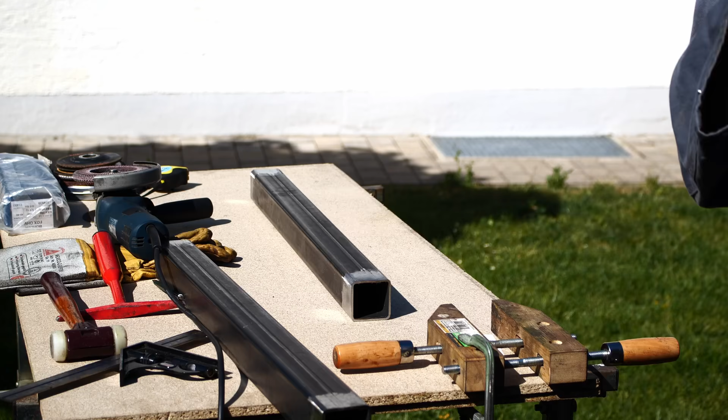Also trying to clean off most of the mill scale. I know that a flap disc is not ideal to remove mill scale, but that's a 3M Cubitron flap disc, and it's quite aggressive and it works okay. And then it's just a matter of clamping everything together and welding it out.

This is the cross member that the machine will sit on, and it's quite a tight fit in the frame, but nothing we can't hammer in place. I double checked with tape measure just to get it a reasonable parallel.

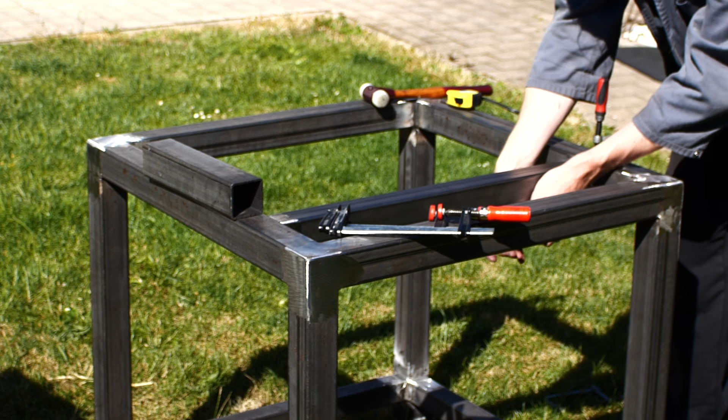The cross-section of the cross member that the machine sits on is smaller than the surrounding frame, because when there is oil on the machine and it's dripping down onto the cross member, I don't want it to run off the frame's side, which would happen if the cross member was the same cross-section, therefore flush with the top of the frame. Here I'm using 2 cutoffs of the square tubing and some clamps to get the cross members flush with the underside of the frame. This arrangement of clamps and the stock pulls the cross member parallel to the underside and flush.

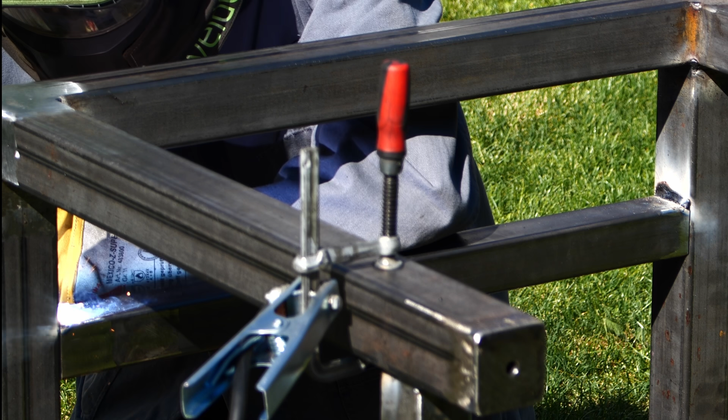And then it's just a matter of welding everything out. I'm not the greatest welder in the world. I'm okay at TIG welding, but with stick welding, I'm always a little bit in trouble. But usually I can stick stuff together and it does not fall apart.

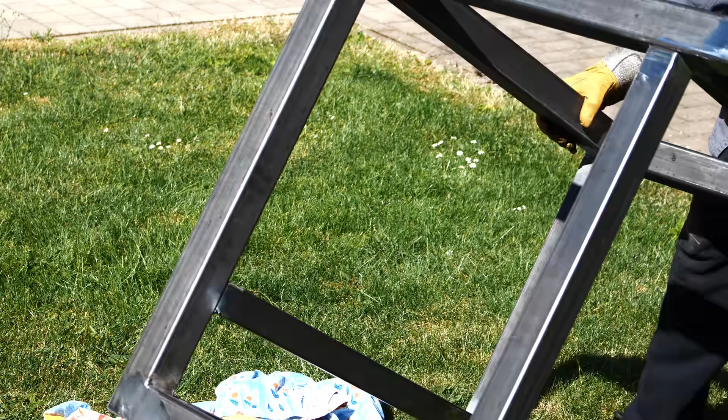It's nice that the frame is small enough so I can flip it around to weld always in a good orientation. I don't have to do uphill welds or overhead welds on this thing. So I can just flip it over and always weld in a good position.

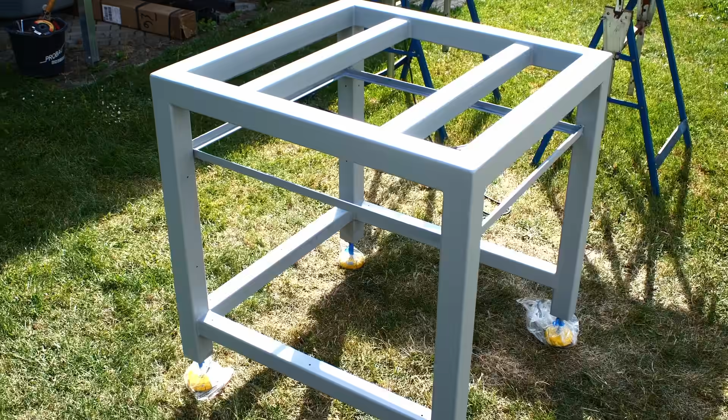And here is the finished frame. It's welded, ground, and painted. It will have side panels, but those will be screwed in with some angle brackets. The holes for the angle brackets are already there. The thin profile frame beneath the machine mounting surface is for a chip drawer.

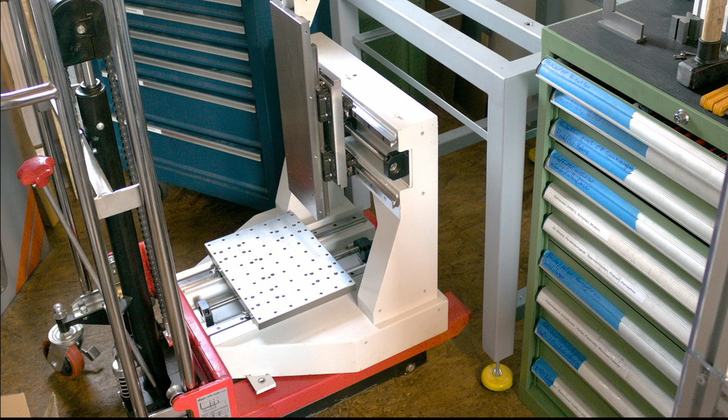The small hydraulic lift cart was more than adequate to lift the frame onto the stand. As it's shown here in the picture, with the rails, the ball screws, the X crossplate and a Z-axis plate, and the table, everything together weighs about 185 kilograms.

I want to make it a nice, rigid micro milling machine to replace my Sorotech CNC router. The CNC router is definitely going away. I'm going to part it out and sell off the components. The CNC router doesn't owe me anything. I have made so many parts on it and it paid numerous times for itself.

But the kind of work I'm doing on the CNC machines has changed. It has gone from larger aluminum work and larger plastic work to, well, aluminum and plastic parts that are about the size of my thumb.

A smaller, more rigid, and also thermally more stable frame will be very nice for that. The Sorotech router did definitely suffer during the day from thermal growth. The machine has really been great for what I purchased it for. It has been dead reliable.

The Eding CNC controller, despite having its problems, especially on 3D machining, and being a little bit slow, apart from that it has been dead reliable, and I'm going to keep the controller for now. I will just make this machine plug compatible, so I'm just changing out the plugs between the stepper drivers, the limit switches, and the spindle, and it should work. It's already working in one axis because I'm impatient.

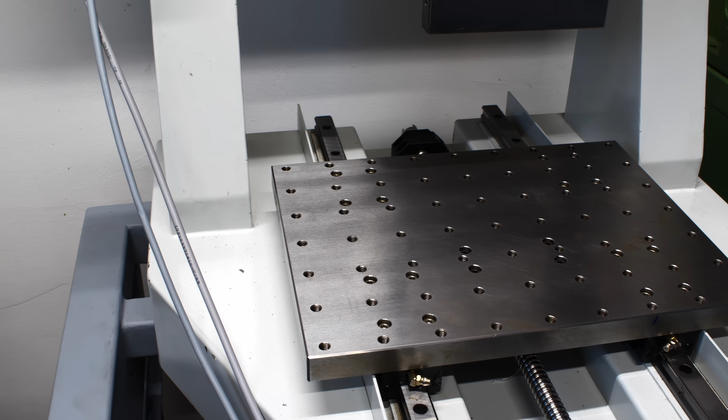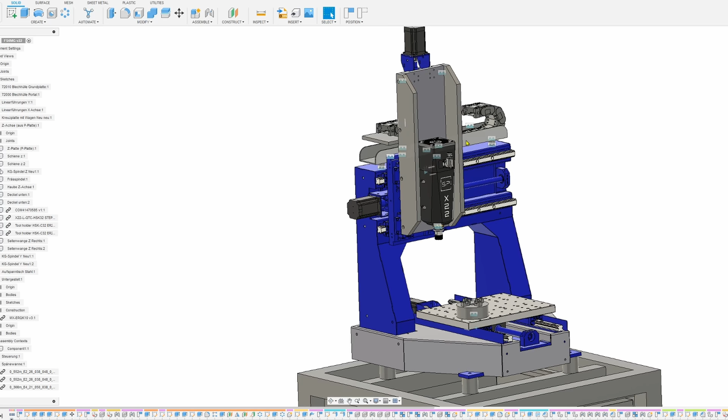2 kilowatt, 25,000 RPM. So here's the CAD model for the milling machine. Just to get an idea, I took the 3D model of the X22 spindle that I ordered with an ER20 collet chuck and put it onto the Z-axis, and this gives me already a pretty darn good idea about the final travel of the thing.

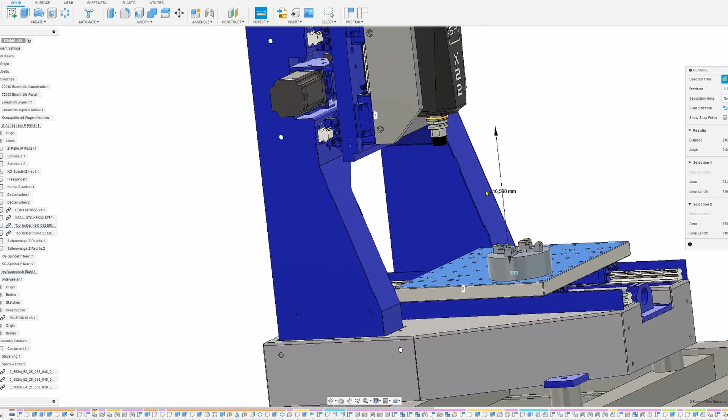In the most upper position, I have about, let's do an inspect here, from here to the table, 216 millimeters. So I have at least 200 millimeters from the tabletop to the collet nut. Then minus the tool length, so I can work on some parts that have a little bit of height.

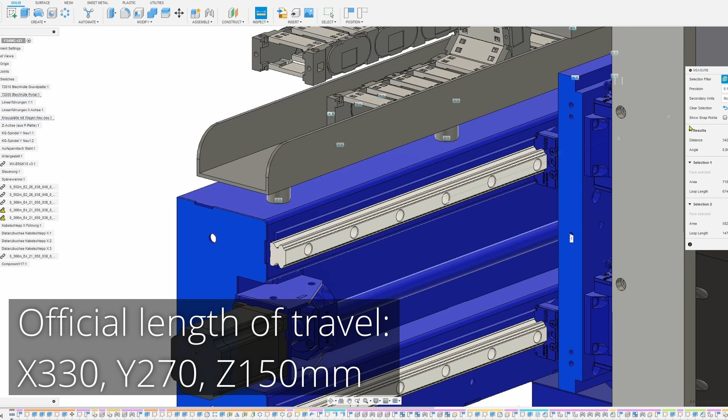The overall travels of the thing are about 340 millimeters in cross direction. The official travels are a little bit smaller because I think they leave a little bit of margin for error, and also some space for way covers, which I do not take into consideration for these measurements now. Just to give you an idea how small or big this frame is, the table travel is about 280 millimeters.

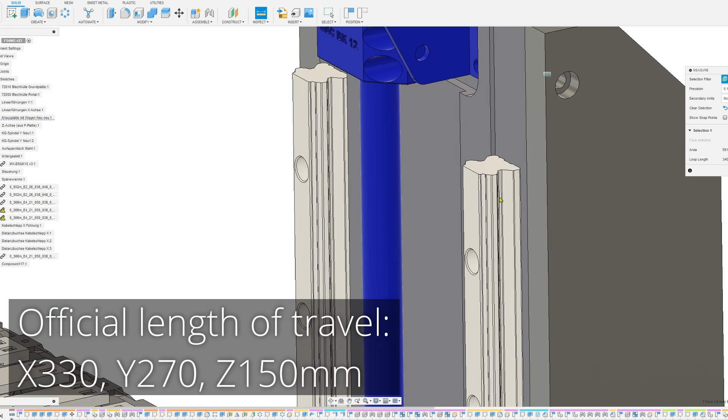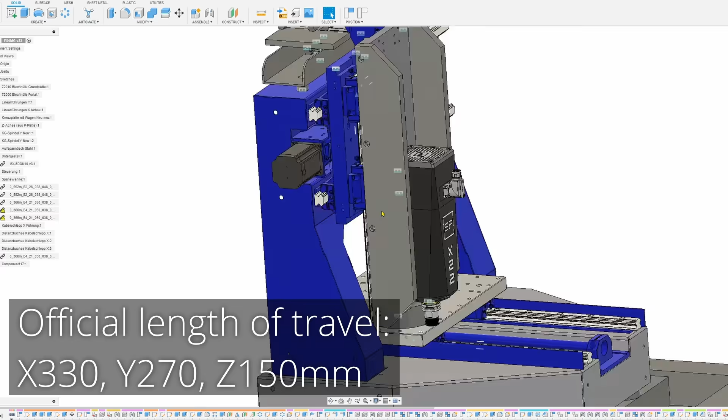It's a nice little stout machine frame. As you can see, I already played around with the drag chain up here. And just like some people, the machine is a hollow shell of itself—they did not put the epoxy granite in the 3D model. And no, on this machine you cannot separate the gantry, the blue gantry, from the base. That's one piece, not meant to be taken apart.

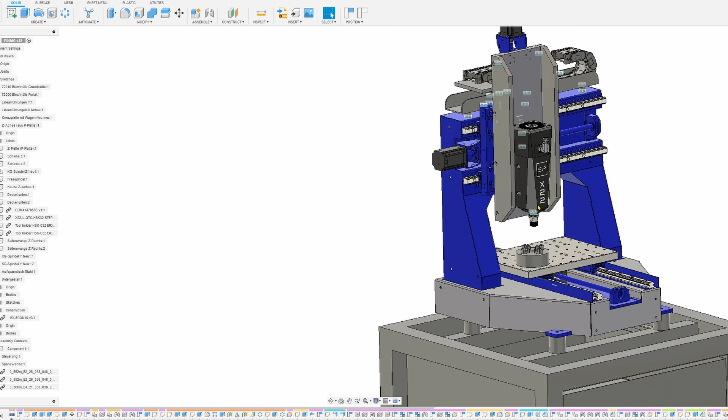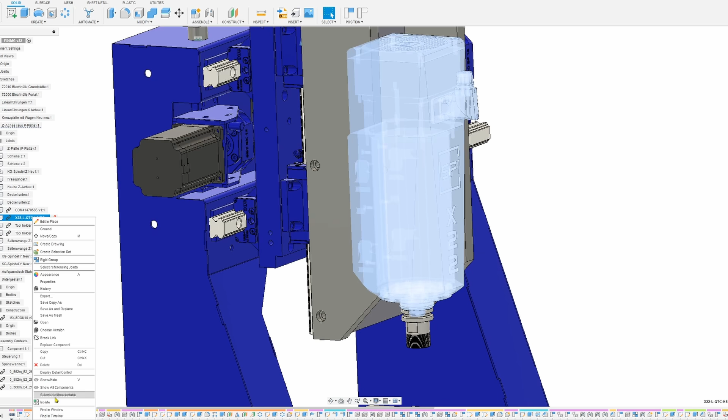You would need an angle grinder with a diamond wheel for that. But yeah, that's how the spindle will mount, and the nice thing about the Spinogy spindle is it mounts from the front. They have keyholes on the back where you just hook it over some screws, and then you have this angled hole where you can tighten the screws from the front. So you don't need an adapter plate or need to screw it from the back, which I think is quite a nice design feature.

And I didn't go with a water-cooled spindle. I have chosen the air-cooled variant with a separate 24-volt fan.

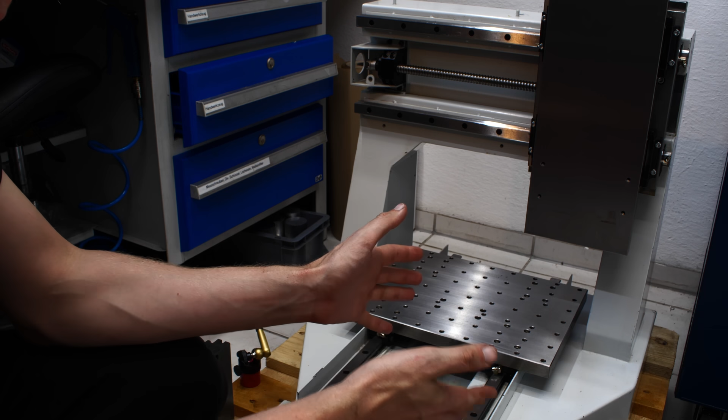There are a few things in the machine geometry, in the milling machine geometry, that we can check. The first and most basic thing is to check the flatness of the table in relation to the X and Y axis. That's very easy. We just put an indicator on the Z axis in this case. I have a small magnetic base here.

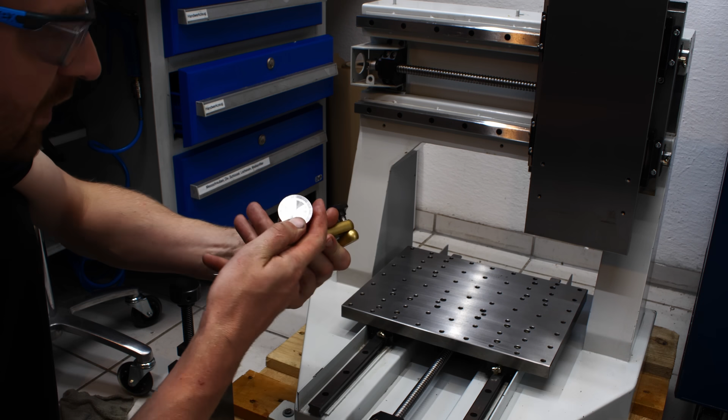We can drop an indicator on the table, get it in contact, and now we can jog the table. Since I don't have motors on this machine, this is my drive servo now. We start by jogging over in the X-axis, or what will later be the X-axis.

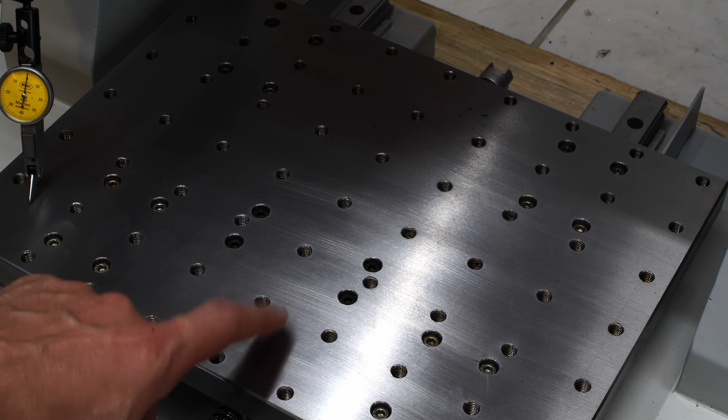I think we went from 0 to 0 on both ends with a 20 micron dip in the center. Let's mark this down. Now we move the table to the front, which means I have to reach back through the machine frame to get to the coupler.

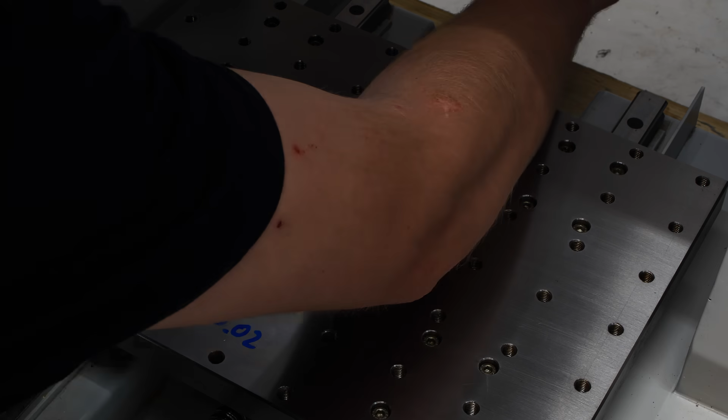Okay, excellent framing on the video here. We're still at 0 here. Now we move the indicator over here using the X-axis again. Okay, here in the middle we have this minus 0.02 millimeter divot again. And we're at plus 0.01 millimeter out here.

Let's move it to the center of the table too, because that's kind of interesting. Okay, that's also minus 0.02. So the entire flatness of the table, as I've mapped it out by now, is within minus 20 plus 10 microns. We got the flatness of the table sorted out.

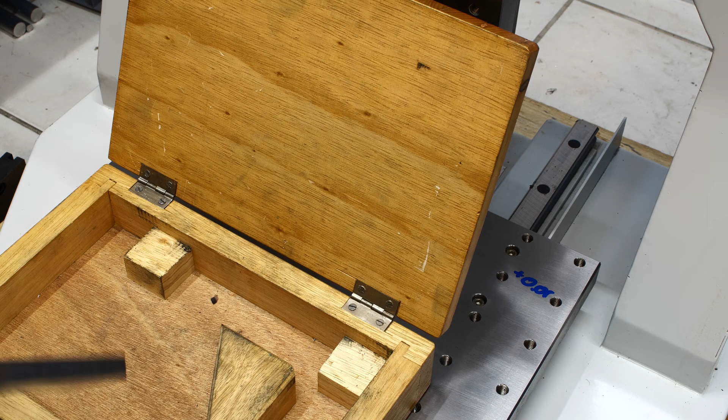Next thing would be the squareness of the X in relationship to the Y-axis. That's also very important. I have a reasonably accurate square here. Last time I checked this, it was basically a deviation of less than 10 microns squareness between those two sides of the square.

And for checking the squareness, we put this on the table. We will clamp it down with one bolt, just so it stays in place. Brass shim, so we don't damage the square. Heavy washer and a nut.

Okay, and to check the squareness now, we align one axis of the square with one of the axes of the machine, meaning we get our indicator here. For those who are wondering, this tiny indicator stand is made by H&G. A friend showed it to me, and I like to have a small indicator stand in addition to my large ones, and this has an excellent fine adjust up here, and I'm very happy with it. So I got it here on 40, and I'm traversing the x-axis with the cordless drill,

And I'm going to bump the square. Okay, that's not too bad. We start at 41.

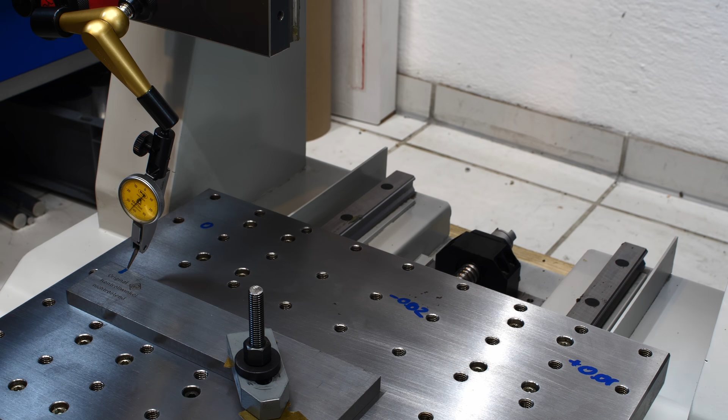Okay, I get basically a 0 to 0 reading end to end, and this also checks the straightness of the axis we just moved, so that's very convenient. So we're double checking two parameters here.

Now that we have one axis of the square in line with one of the axes, we can move the indicator over to the other side of the square and check how square the other axis is to the first one. You'll probably get a little bit of a parallax error because you're not looking straight on the needle, but you just have to look for movement of the needle, not the actual reading. Let's get my power feed back there.

So that's a squareness of 10 microns over this distance. How much? 130 millimeters. So that's very reasonable. That's really nice, I like this.

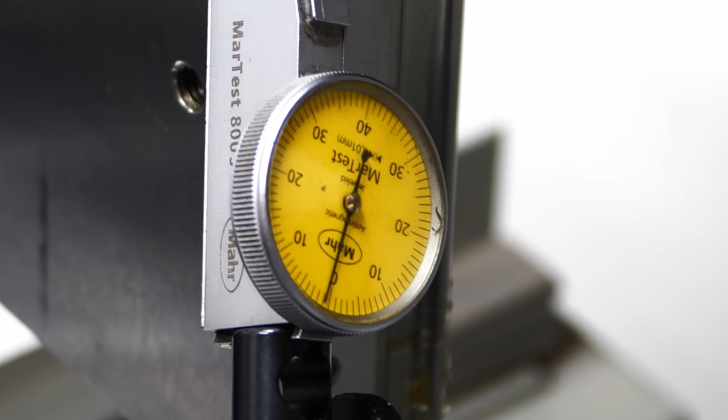To check the backlash of the ball screw, I hooked up the stepper motor and the driver to the control of my CNC router, and I'm stepping back and forth 10 microns on the hand pendant. And that's pretty much exactly what I get on the dial test indicator measuring the actual movement of the axis in both directions, meaning there is no lost motion or backlash, or very minimal, within the 10 micron resolution of the indicator, which also has its own measuring error. But that's already very, very promising.

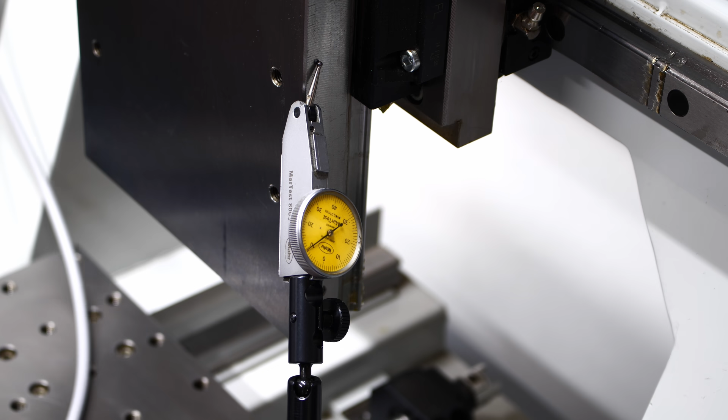Look what arrived during filming this video, the spindle. This is a Spindle X22 HSK32 spindle with a manual tool change, 25,000 RPM spindle.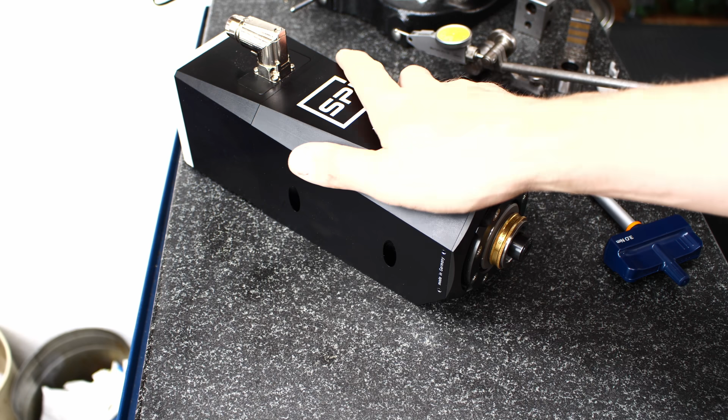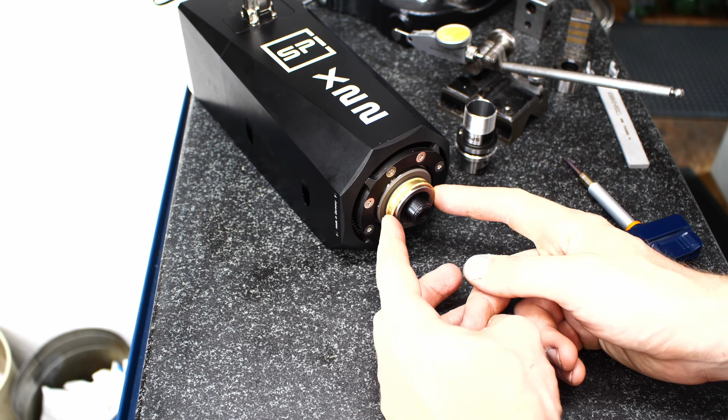They're made in Germany. They built the complete motor themselves, and the HSK interface in front here, this part is from Kern. You can purchase that if you want to build your own HSK spindles. The interface and the clamping mechanism that pulls the HSK tool holder into the spindle, that's purchased.

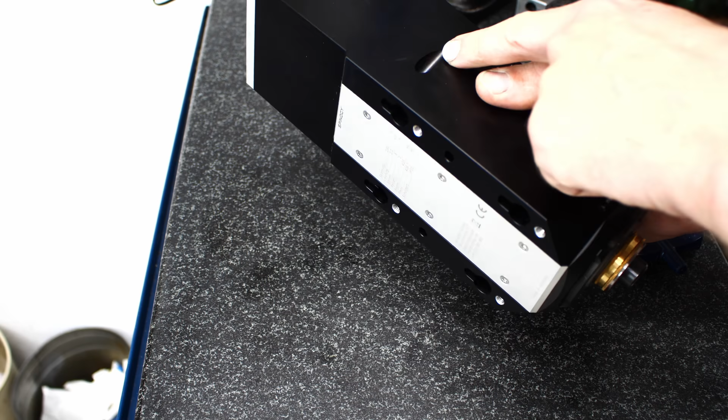As I mentioned, they have this key slot feature on the back, so you can bolt the spindle on from the front. You hook it over the screws, and then you tighten it down from the front with a ball end Allen key through this angled slot.

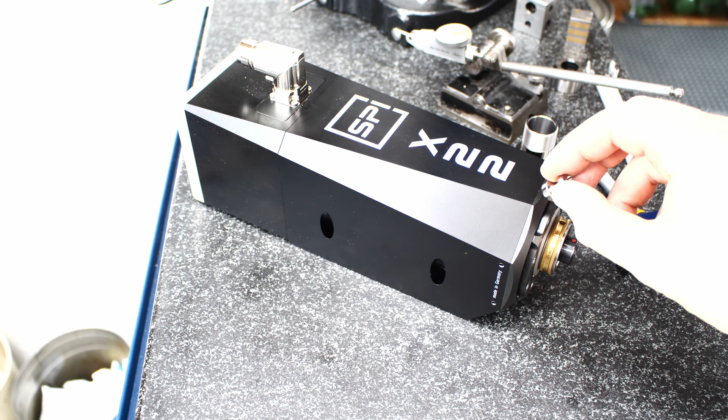Most of the housing is aluminium. It's nicely machined and anodized, what you would expect. But this lower cap here, this lower end, is steel. So I guess this extends somewhat into the aluminum housing, and I guess—that's a wild guess now—it contains at least one of the bearing sets.

Why I really bought the spindle is the HSK interface. After a few years of running collet spindles, like on my Sorotec router, using two wrenches to tighten and loosen ER collet nuts, I decided it's time for an upgrade.

And the way this spindle works, you have an HSK interface and a regular HSK-C tool holder. As far as I can tell, or as far as people helped me figure out, HSK-A should also be clampable with the system. The only difference is HSK-A has an index notch for a tool changer, and the groove for the tool changer arm looks different, as far as I know.

So you have a dot on here, an engraved dot. You align it with the red dot on the spindle.

It goes in. Come in with your torque wrench, and you give it something like 2 rotations, and then it's clamped.

To get the tool out, you open it until you feel a little bit of resistance. You overcome the resistance, and then it gets pushed out of the taper. This is a very shallow taper, so it's extremely self-locking, like a Morse taper. For that reason, you need the force to push the tool out of the interface.

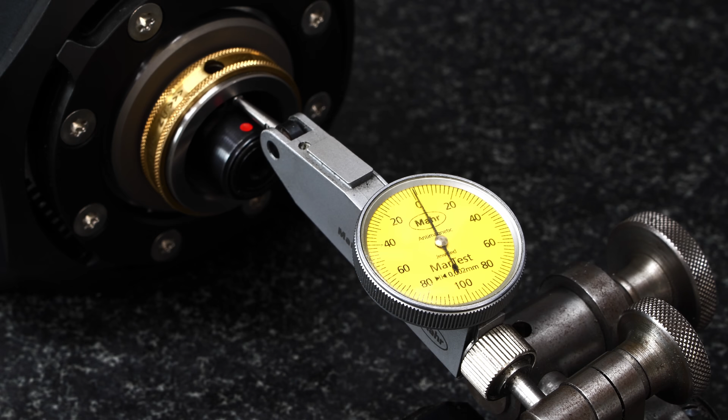That's a 2 micron indicator, and the needle is jumping between 0 and 2 micron. So that's very promising already. Let's see how it behaves with a tool holder in it.

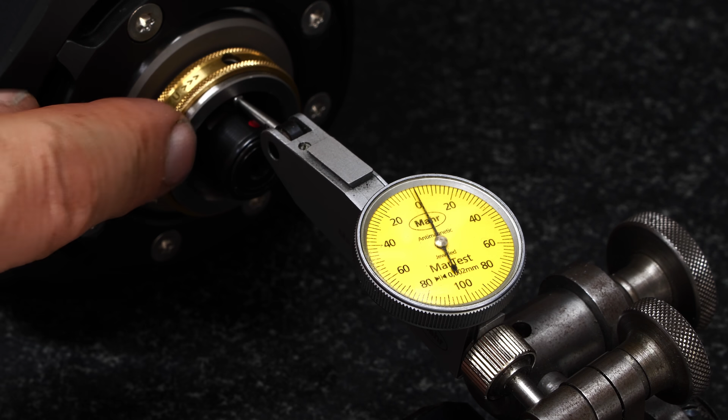While we're here, we can take a look at the clamping mechanism. When you look down in there, I come in from the side with the Allen key, and when I spin the Allen key, this block comes out to the side. That's a floating element in the spindle. That's really hard to show. It's this block that gets wider and expands into the back of the tool holder.

And since it's floating in there, it's finding its center in the tool holder itself. That's the reason why it's floating. It's self-aligning, basically. I need a taper wiper for HSK32. Don't have one. Forgot to order one.

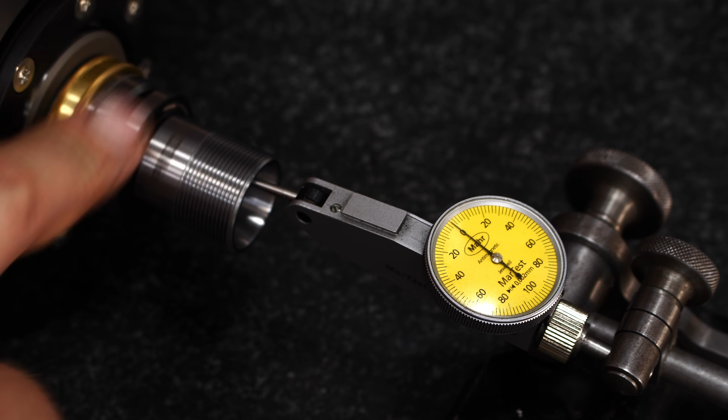Let's get the tool holder in. Yeah, that's about the same as in the spindle taper. That's really darn good runout for a reasonable, affordable spindle. Considering what a spindle on a vertical machining center costs, this is really a bargain.

I know it's real money. I think the spindle and the tool holders were about something like 3,500 euros, including tax. But still, that's an incredible degree of precision that you get here.

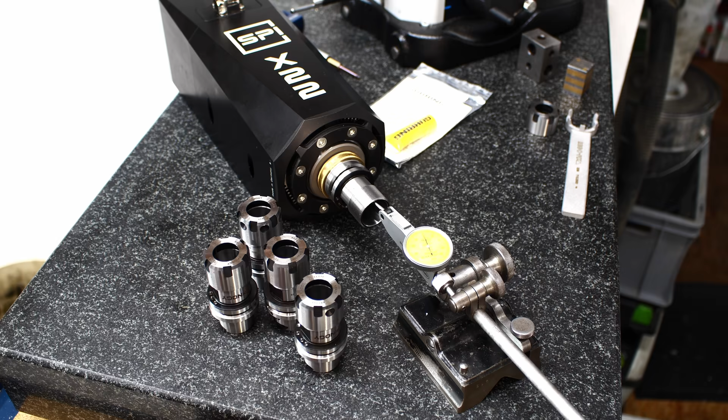Of course, running the spindle will tell the whole story. Just measuring runout and things like that on the surface plate doesn't tell you a whole lot. So I purchased the spindle with 5 tool holders, and it also came, well, I also bought the torque wrench, collet nut wrench. The spindle comes with some molybdenum paste and the manual for the HSK interface.

You have to lubricate the interface from time to time. That's the same as on a real VMC spindle. Also got the shielded cable with the correct plug.

They have other options on RPM. I think you can get them up to 55,000 RPM, but I decided against the high RPM spindle because 25,000 RPM is usually a very good range for general small machining. Not speaking micro machining, but for end mills down to 0.5, 0.6 millimeters, it's perfectly adequate, and you can make smaller end mills work on such a spindle without problems too.

You just have to keep your chip load the same and reduce the overall feed. It has a 24-volt fan on it, so the cooling fan that cools the spindle motor itself is not connected to the spindle itself, so it's not spinning at 25,000 RPM. And that means it's a little bit quieter than spindles with a mounted fan.

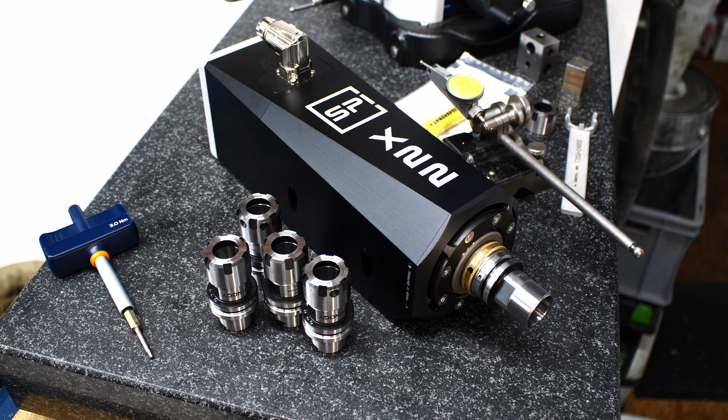The other option would be a water-cooled version, also an option on these, but I'm always hesitant with water-cooled spindles because that's a lot of added infrastructure and stuff that will leak over time. Notice that I said will leak, not could leak. That's the reality of industrial equipment. It's not the question if it will fail, it's the question when it will fail. And when it fails, how catastrophic will it fail?

So this is the motor I'm going to use on all 3 axes. It's a Lichuan Easy Servo Motor, model ESM 22430. This is a closed loop stepper motor. Means it has an encoder that tells it if it has reached its final position.

So closed loop system. It doesn't give you feedback of the axis position like you would have with a glass scale on the machine, but it gives you at least a feedback of the ball screw if it reached its destination, or if it lost steps in the process, or it crashed. If it crashes, it will give a follow error and the machine will e-stop.

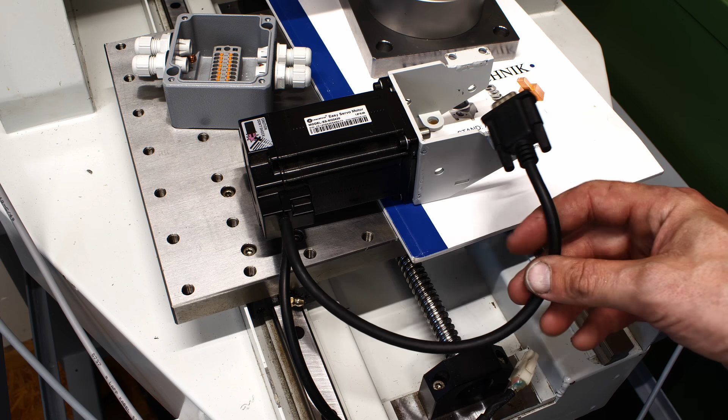That's very nice too. Problem with these motors is the connection. The encoder is hooked up with a 15-pin sub-D connector, which is okay, I think, this would be quite fine. But the motor windings are hooked up with this Molex mini-fit connector, I guess, and this just doesn't instill a lot of confidence in me, hanging out in the breeze.

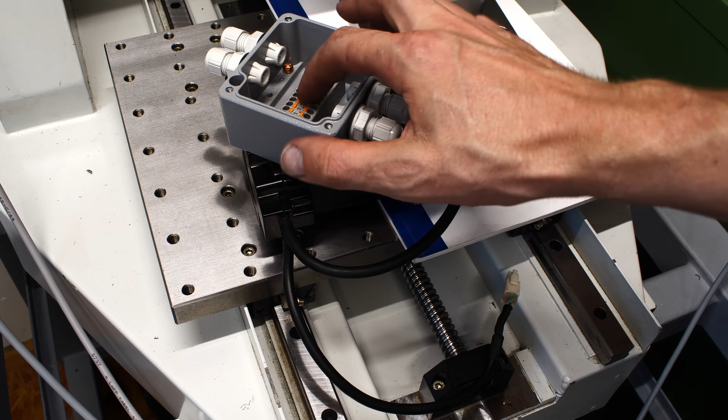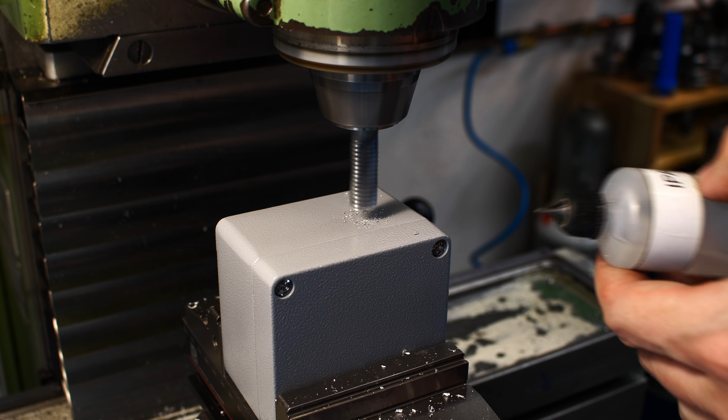So I figured I'd get some die-cast aluminum housings and put a terminal block in there. I cut off the wires or the plugs from the motor, run them in, and put the wires onto the terminal block. Then I can use some nice cable that can be used in drag chains to go out this box and directly onto the driver cards.

I'm drilling the holes for the cable glands with a 12mm end mill because, believe it or not, I do not own a 12mm drill bit. A nice sharp end mill works quite well for this purpose, especially since the holes are not very deep and it's just die-cast aluminum.

The cable glands from Lapp Cable just snap in from the outside, and then you tighten the nut from the outside. It's a fairly nice design. We used to use them at my day job a lot.

Since I already had the tapping head in the drill press, I went ahead and tapped the M2.5 threads for the terminal blocks with it.

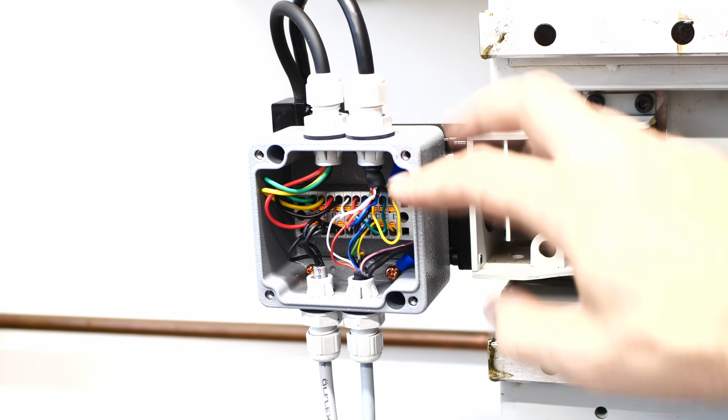Here is one of the connector boxes finished, with the motor wires and the encoder wires coming in onto the terminal block, and then I'm going out with cables that are suited to be run in a drag chain. I'm not stuck with the stinky little Molex connector right here in front of the mill.

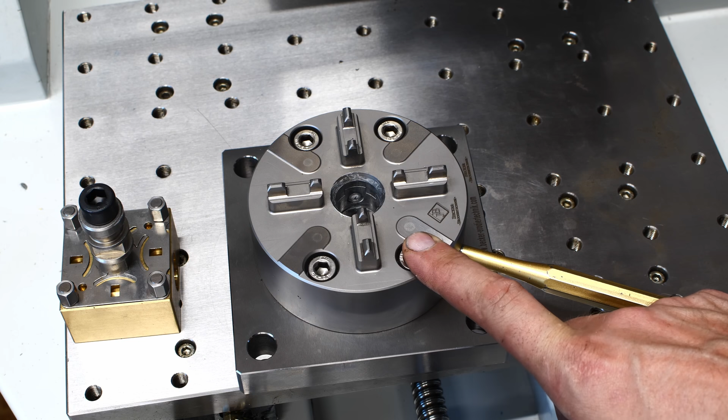This is the ITS chuck that I was talking about. I bought it from these people, Becker Erodiertechnik. It's Erowa ITS compatible - I think the patent from Erowa ran out and everybody can make these now. What it is, it's a zero clamping system.

Basically, you have pallets that drop in here, you lock them in place, and you can do your machining on these. You can unlock it, take it out, put in the next one, and each one will be located 100% - well, nothing is 100%, but very, very close.

I think the XY tolerance on the ITS chucks is like 3 microns. Same for squareness and parallelism to the base. Parallelism is probably even better, because it's a very simple arrangement to get the parallelism.

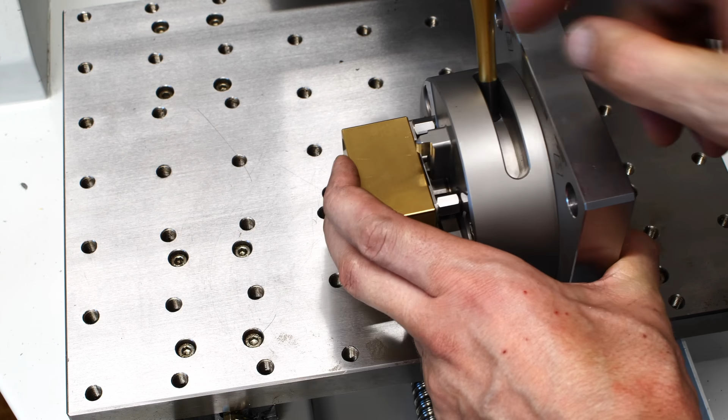So what that can also do, it can do 90-degree indexing. Let's say you have this standing up 90 degrees - you lock your whatever you're working on in it, do your machining from one side, then you can spin it around 90 degrees, lock it, and do basically poor man's fourth axis, relatively precise.

Normally you would find this system on real CNC machines, mainly or mostly, very much on RAM EDM machines and the machines that mill the RAM EDM electrodes.

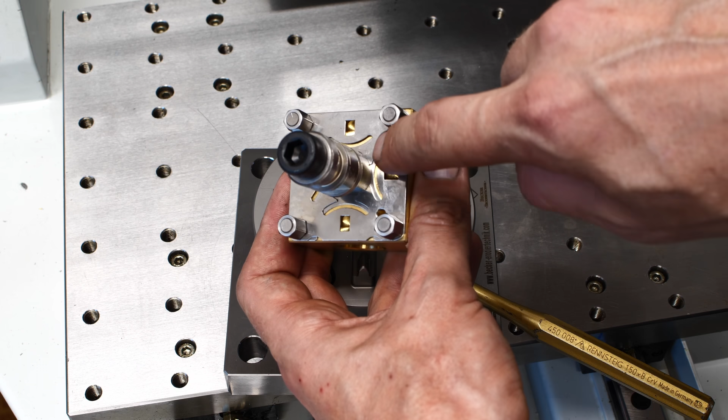The pallets locate via a stack of 2 spring steel plates. It's just those 2 plates on here, and they have 4 rectangular cutouts in them. The chuck has these ground posts, and these are slightly larger than the cutouts. You can see there is a banana-shaped slot in the sheet metal, and that allows these 4 pegs to expand the square hole in the sheet metal, giving a very much over-constrained fit of the pallet on the chuck.

The chuck itself gets pulled down on this draw stud on this tapered section here, and there is a set of 4 balls in the chuck. When you tighten it - this is a manual chuck, there are also pneumatic ones or hydraulic, I guess - just from the side with a pin, those balls get closer to each other and pull down on this ring and pull the pallet onto those 4 pegs.

And the Z height is defined by those 4 standoffs. When these hit those 4 ground surfaces on the chuck, it's seated and the Z height is fixed and you're ready to go. You can buy, for example, these brass blank pallets.

Usually you machine some sort of feature in it to hold your part. You can make everything an Erowa compatible pallet by purchasing the sheet metal set, the 4 standoffs, and the draw bolt. The draw bolt is the most expensive part. I think the sheet metal and standoff set is like 50 euros, something like that - not entirely sure.

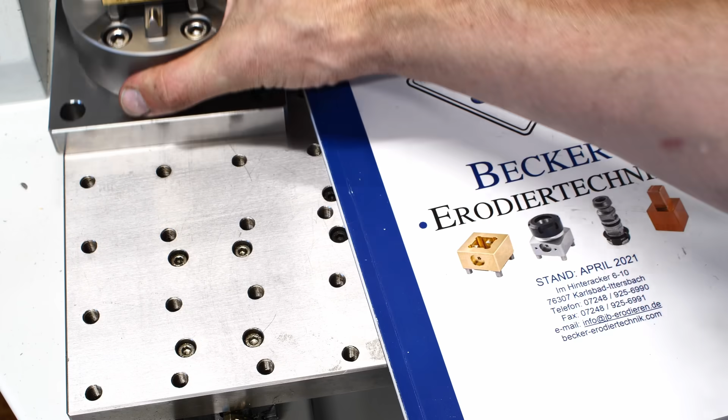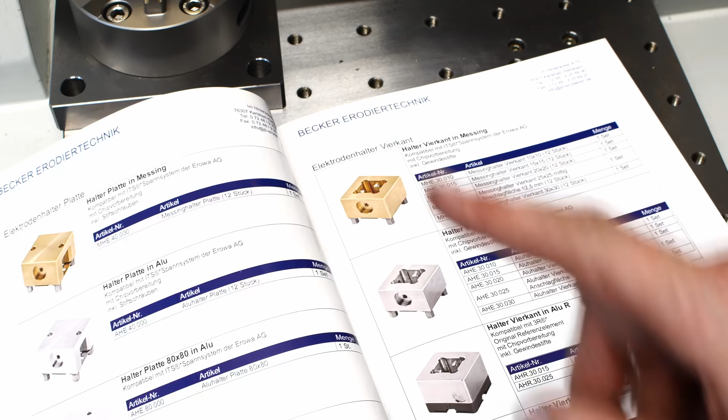You basically have a ton of options with these chucks. That's the catalog from the people where I got the chuck from. These are standard blanks, and also this is something that's very standard in the RAM EDM world.

This is an electrode holder for square, graphite, or copper electrodes for RAM EDMing. You can get them in brass, aluminum, or steel. Usually they come in sets of 12.

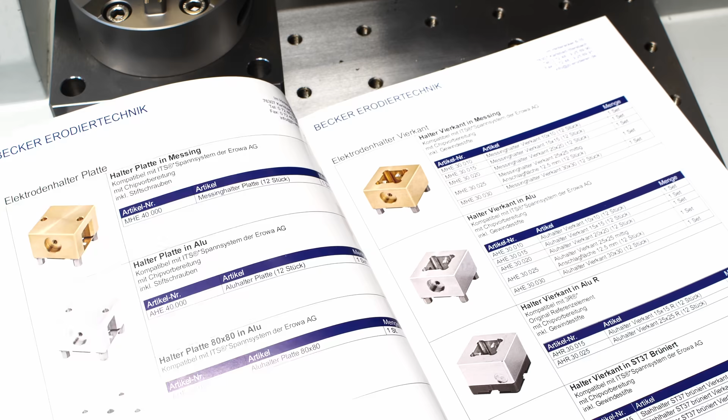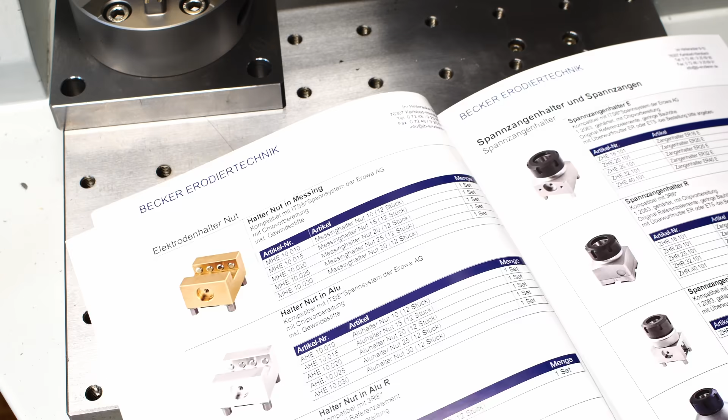You can get a lathe tool holder style option, where you can hold a slab of material in there with set screws from the side. You can get collet chucks that fit onto it, different sizes. And collets, even more collets.

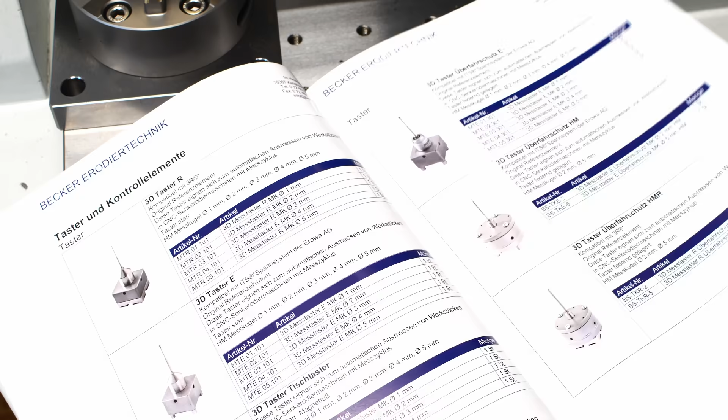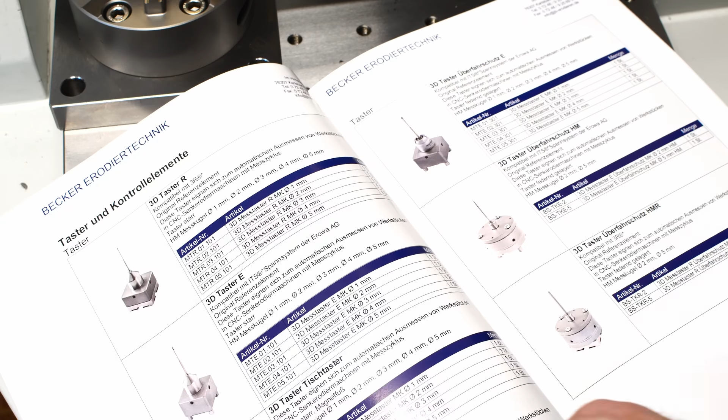These are probes. You need those on the RAM EDM machines because the chuck is not only used for the workpiece - you usually have 2 of these chucks on an EDM machine, one on the table for the workpiece and one on the RAM for the electrode to go bzz. On the RAM mounted one, you can use a probe to touch off your work coordinate offset. And there are also inspection arbors to find the center of the chuck.

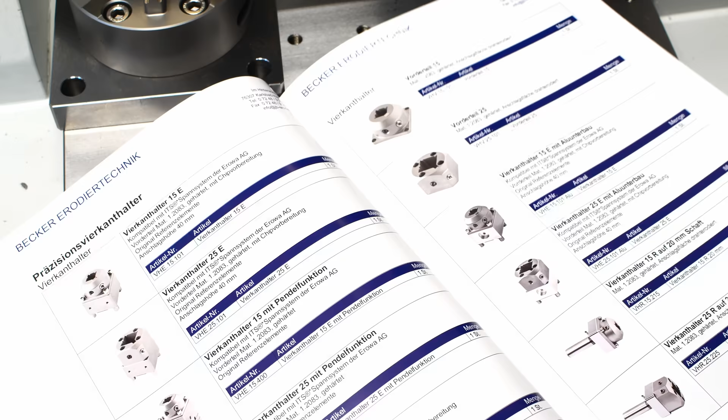You can get a microscope for EDM machines. There are adjustable electrode holders. Well, these are less interesting for milling. This is mostly for EDM people.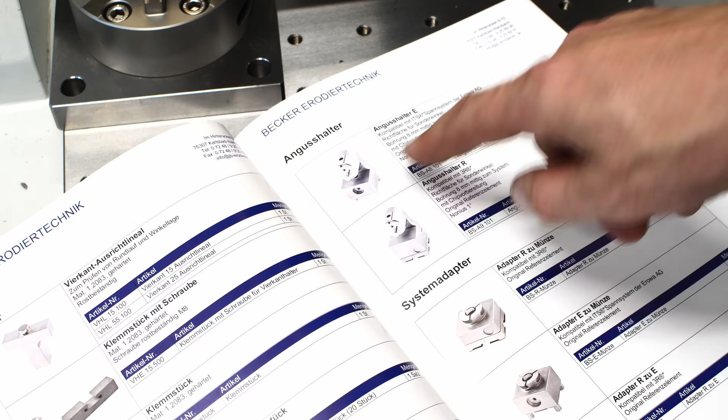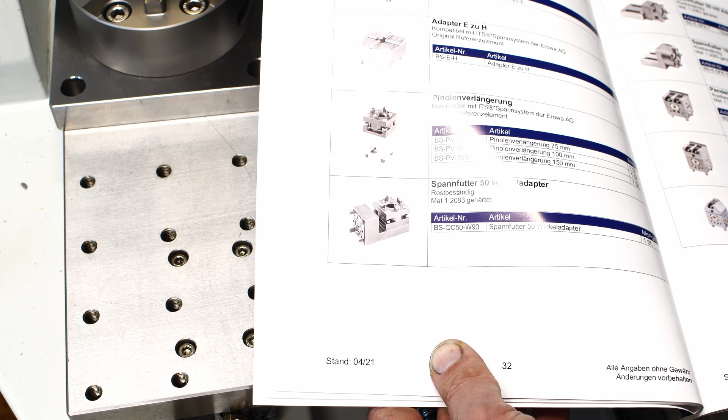You have electrode holders that you can angle manually for doing sprues on molds. This is interesting - you have a 90-degree adapter here. So you put this in and you get a second ITS chuck on top at 90 degrees. So instead of buying a second ITS chuck to do the poor man's 4th axis work, you could buy one of these and flip the work that way.

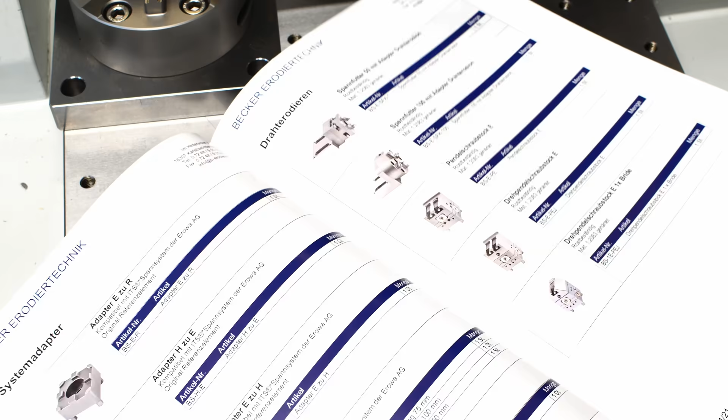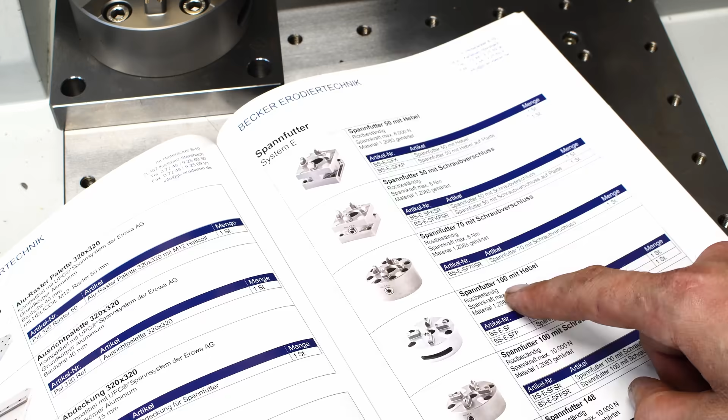There's also wire EDM work holding. There's a lot of wire EDM work holding, and this is a larger system for 148 millimeter pallets. So you have the different chucks - these are 50 millimeter, 70, 100. This is the one I got, which takes the 50 millimeter and the 100 millimeter system, and there is the 148. These are all manually actuated.

You could put this on a lathe too. Here are the draw bolts. These are fairly expensive, unfortunately, but you don't need a whole ton of them. They're relatively easy to change out because they're just screwed in. There is no big precision requirement when mounting them - they are aligned by the sheet metal itself.

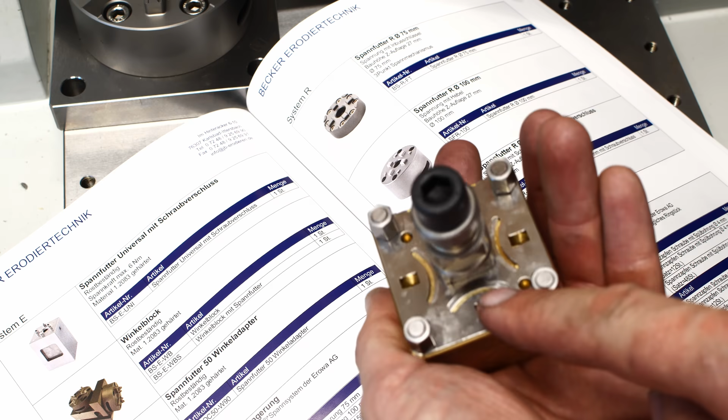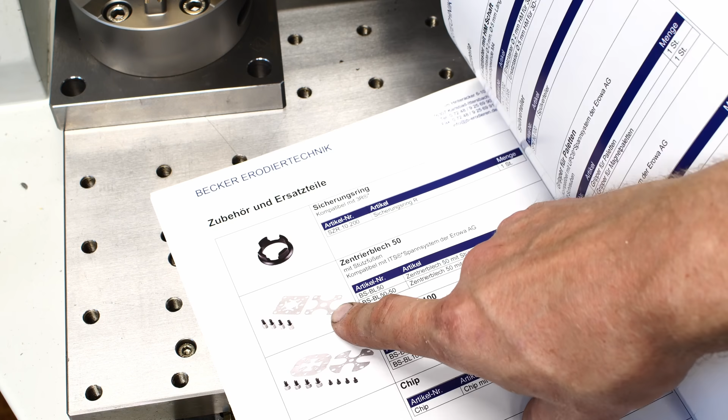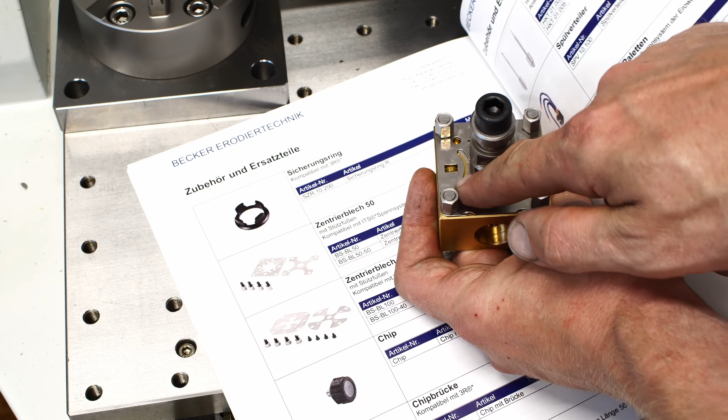And here's the sheet metal set, the locating sheet metal. You get the 2 sheet metals and the 4 standoffs. The precision requirement for machining to mount the sheet metal to a pallet is relatively trivial - you can do it on a manual mill without a problem. I think it's 2 dowel pinholes that you use to align the sheet metal when you mount it, 4 threaded holes for the standoffs, and 4 clearance holes where the square peg of the chuck pokes through, and also an M10 thread in the center for the draw bolt.

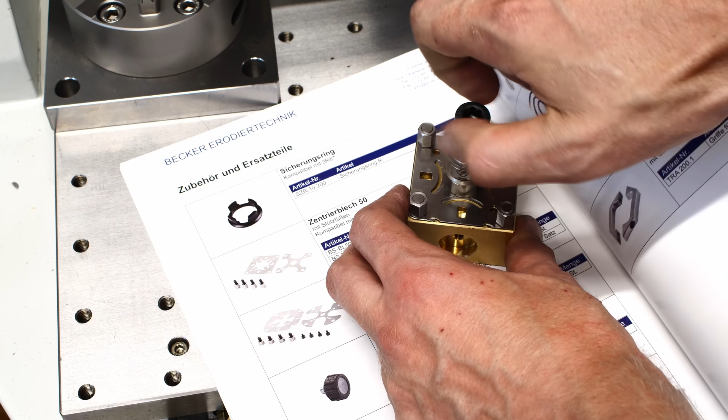So that's a quick rundown of this ITS chuck system. Their special solutions give you some ideas what you can do with it. You could also put a regular chuck on one of these and put the ITS locators on the chuck so you can quick change it.

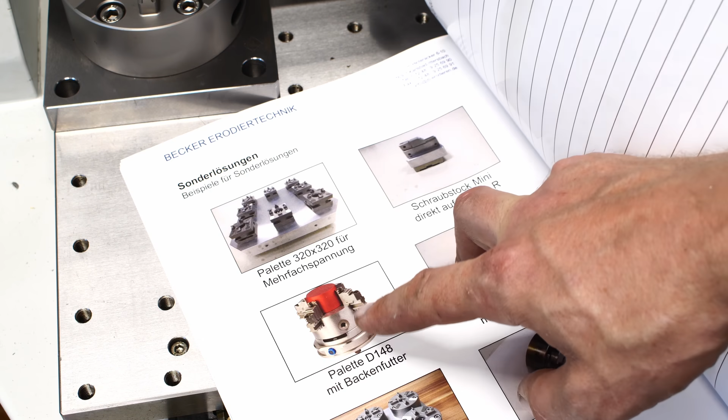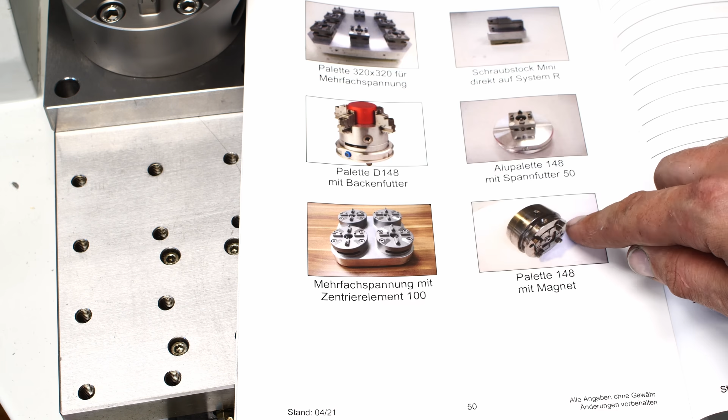That would be interesting for a lathe, for example. You can put multiple chucks onto a fixture, or you can make a magnet with the ITS locating features, or a vise that mounts to a zero clamp system like that. And yeah, I hope to utilize this in my work at least a bit.

Since the precision you get from this system is so good, it's basically you don't lose any precision by using it. When you do like 90-degree indexing with it, it's usually, for the work I do, spot on.

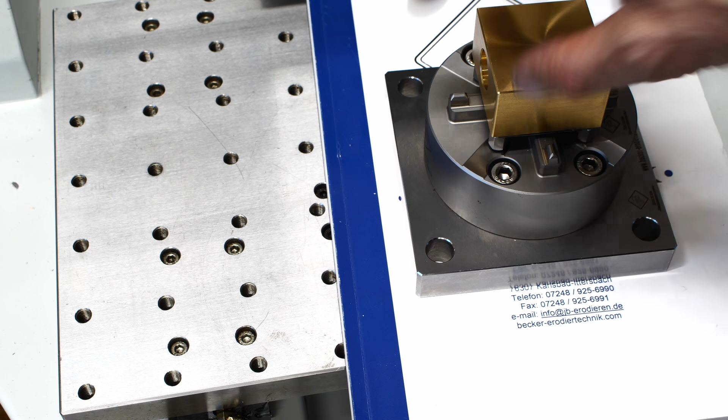And it's relatively robust in regards of dirt. The sheet metal here is relatively - since it's an elastic deformation when it's pulled on the pegs, if there is a tiny chip, it usually gets just shoved away. You only have to be sure that these 4 feet and these surfaces here are clean, so when it seats down, it doesn't sit on a chip. Apart from that, it's really a solid system.

And it's not only for light machining, you can hog on these chucks. There is not a big deal. They are very rigid, despite looking very flimsy sitting on these 4 feet.

So that's the story behind this machine frame and this machine project. I hope you enjoyed this little overview. Thank you all for watching, and I'll be back.